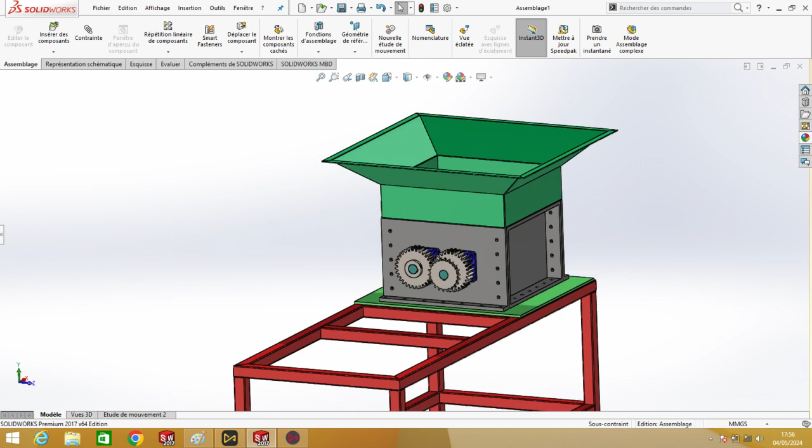In this video today we will make the hopper. This is from the top side of the box of the machine. This we can put our plastic for shredding, so we need a hopper here.

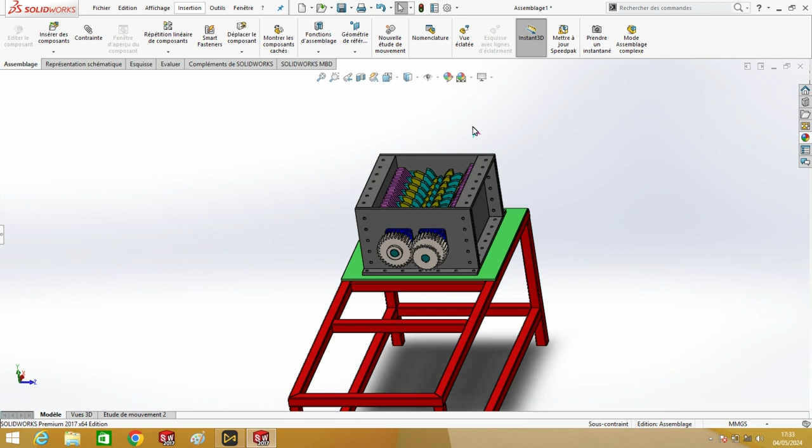So let's start to make this. We need to open a new part. We need also to open this parallel. Okay, like that. We need to know now this dimension, the inner dimension.

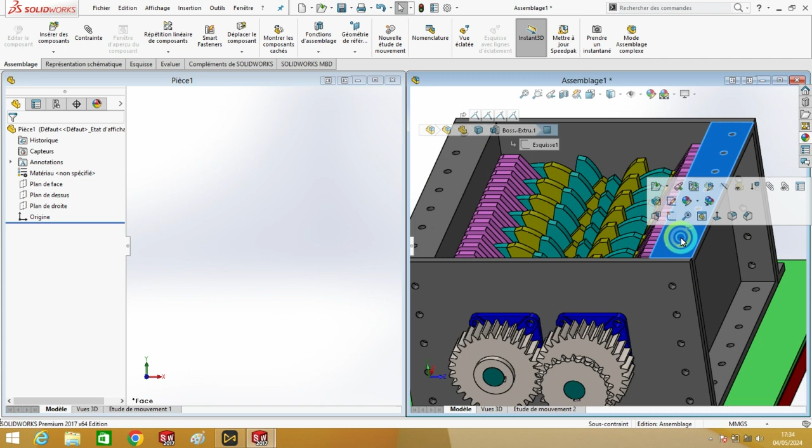Let's make it. Okay, we need to make it on this plan. Okay, so we need this measurement.

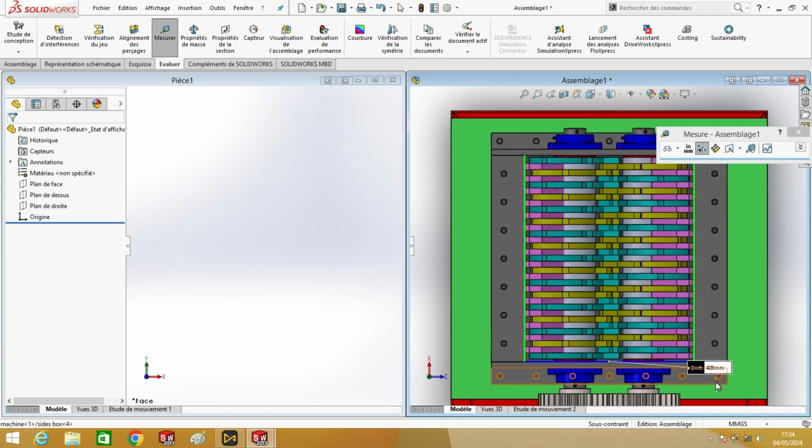First of all we have this, from here to here, it's 406. Okay, so let's make here a rectangle. First of all we'll choose this plan.

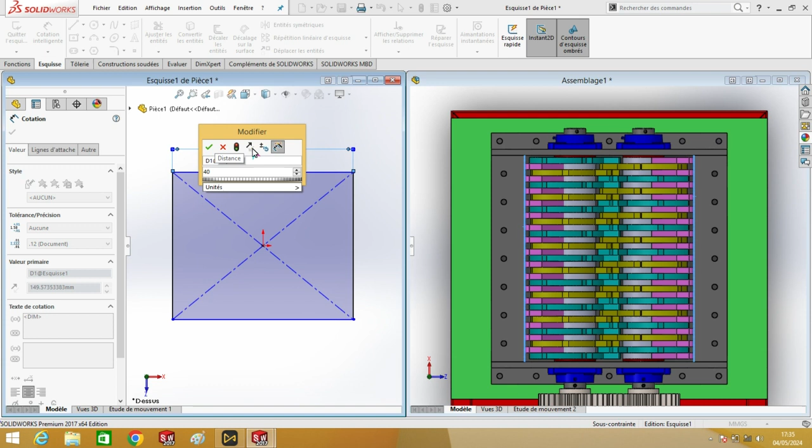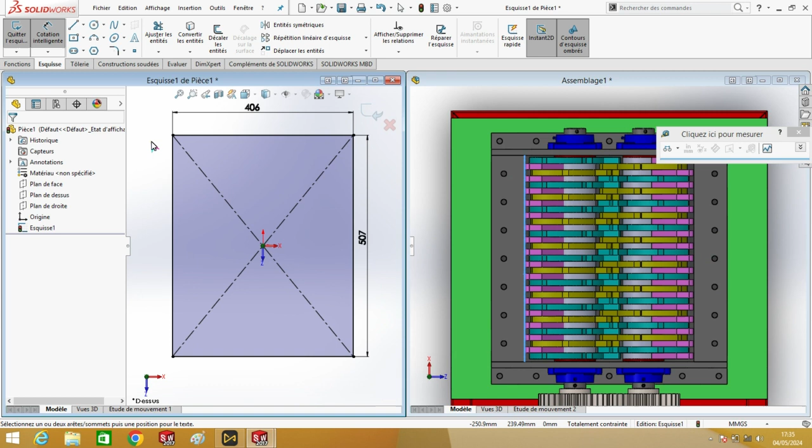This is 406. Sorry, 406. Okay, we come back again here, we check this one, it's 507. Okay, this is the inner. Okay, we have also outside rectangle.

Okay, so we need to know from here to here, 617. So here we have 617. No, sorry, this, not this one. It's from here to here, yes, 537.

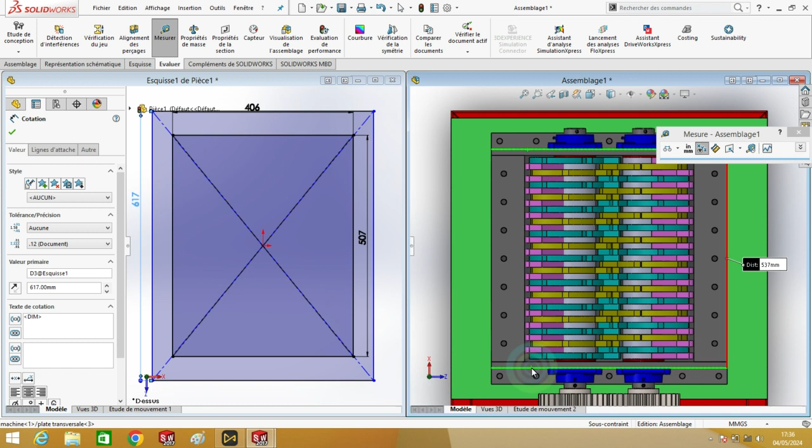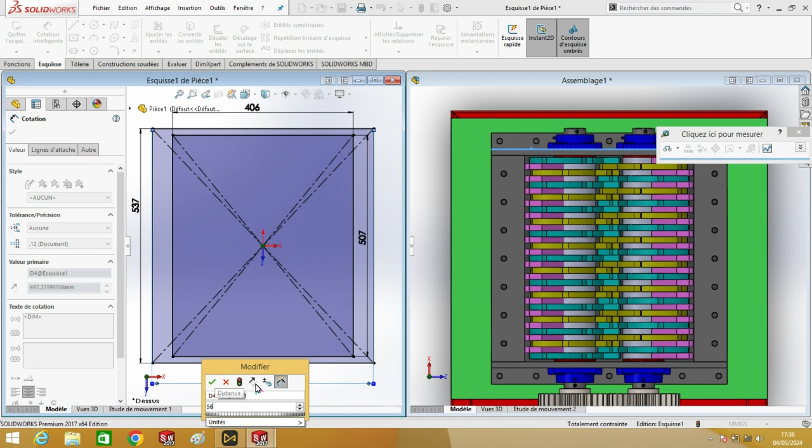This 537, yes. Okay, now here this 568. This 568, and that's it. We can reduce this. We close this.

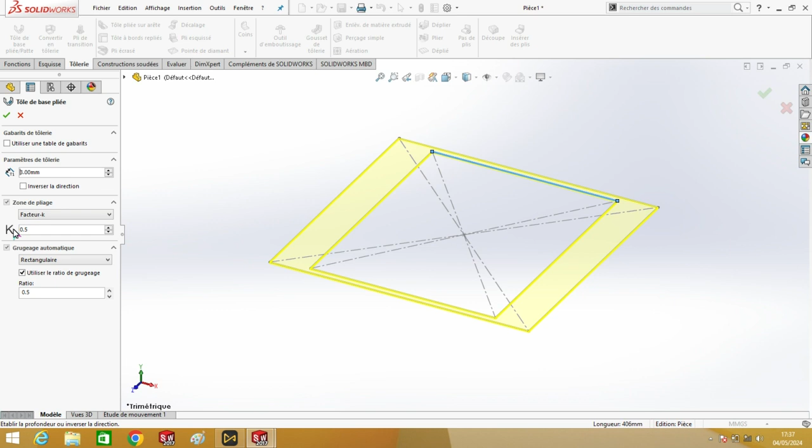Okay, now we go to sheet metal. We choose this sketch, and it's okay. Here we choose 3 mm as the thickness of the sheet. We keep this factor 0.5.

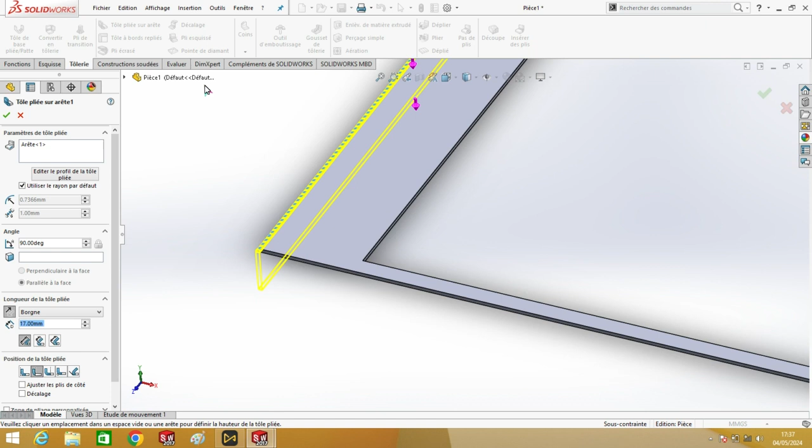Okay, now we need to add edges to make it as a box. So we go here, we choose. Okay, we check one, just one, and we edit first. For example, this needs 90 degrees. If we put it like that, see, if it makes an angle, no, we need it 90 degrees.

Here we need the distance, we make it 150 mm. Okay, here we need it outside. See, if we choose this, it will be inside. Okay, let's keep it inside, better.

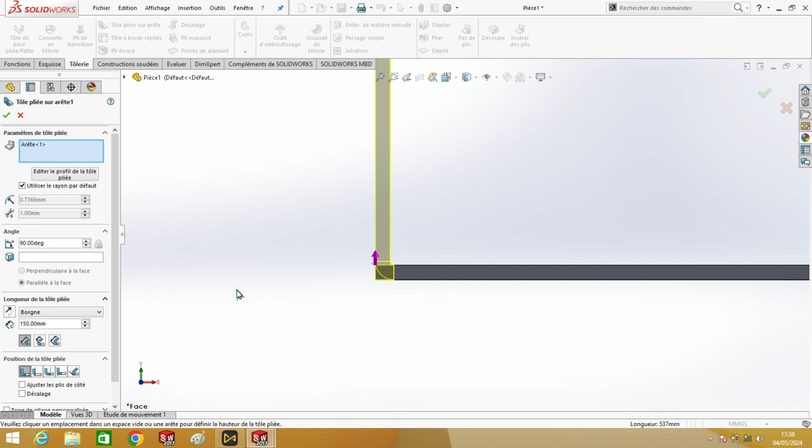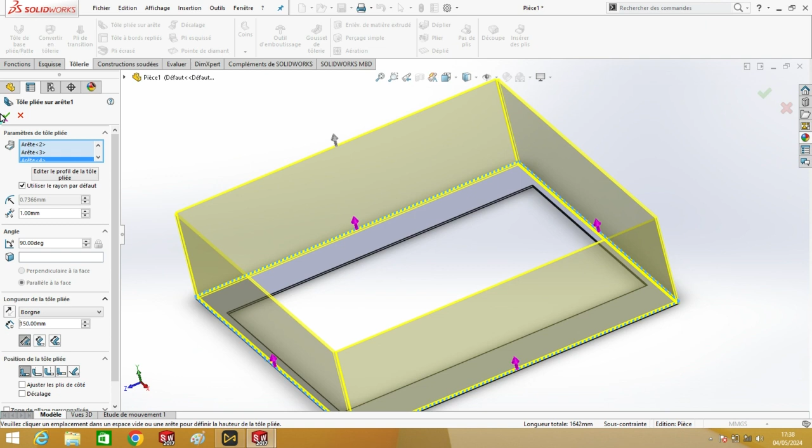Now we will choose the other line. We need to make another edge. SolidWorks automatically recognizes the edges, and it makes them all the same configuration, and we hit OK. Now it's OK.

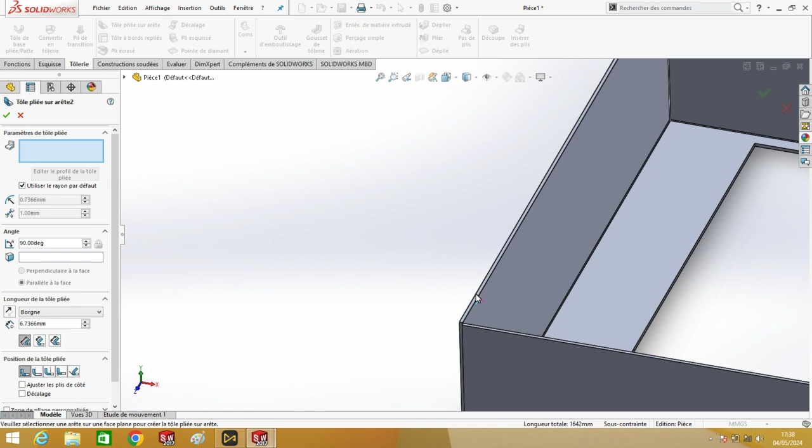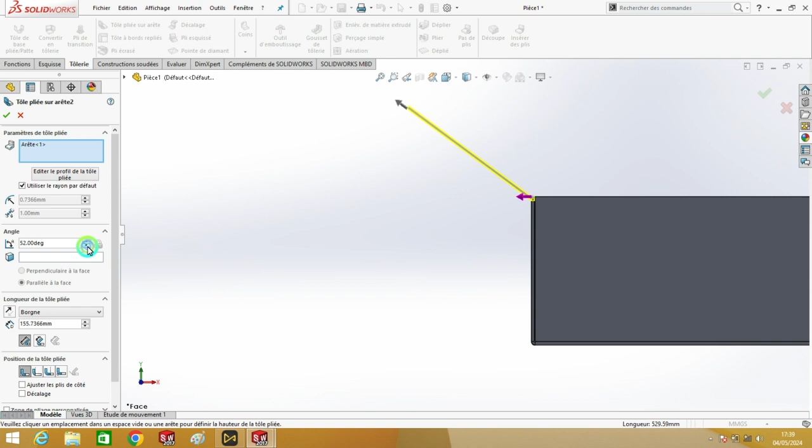Now we need some edges, but not perpendicular, we have a little angle. So as before, we go this, we check this one. Okay, we make it here, and we adjust for the first edges. We need angle, so we'll adjust this. We reduce it. Okay, I think 50 is enough. Let's make it 50. Okay, the length, let's make it 200, and it's okay.

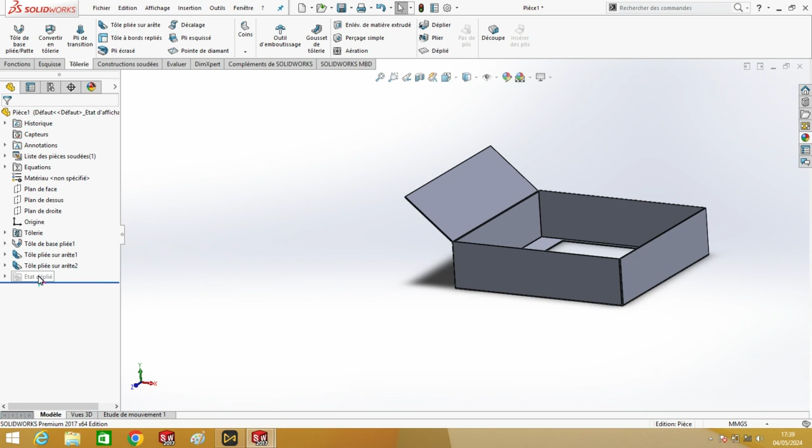Now we have to add the other edges. Okay, so we will choose this also, and this, and this line, and okay.

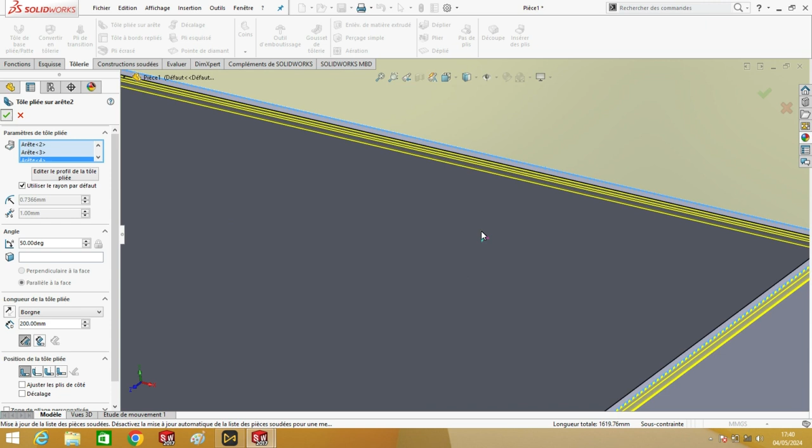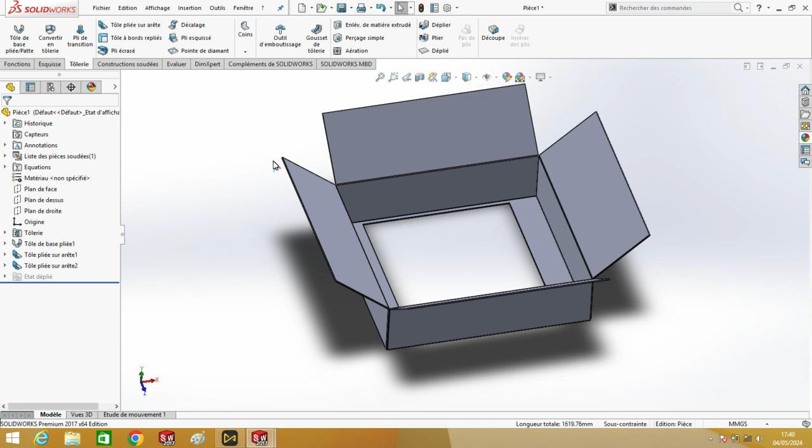See, now it's okay. Now we need to close this whole area. We need to clear it, so it will be like a closed box, closed hopper. But first we need to add here a little edges also. So same as before, we need to make here.

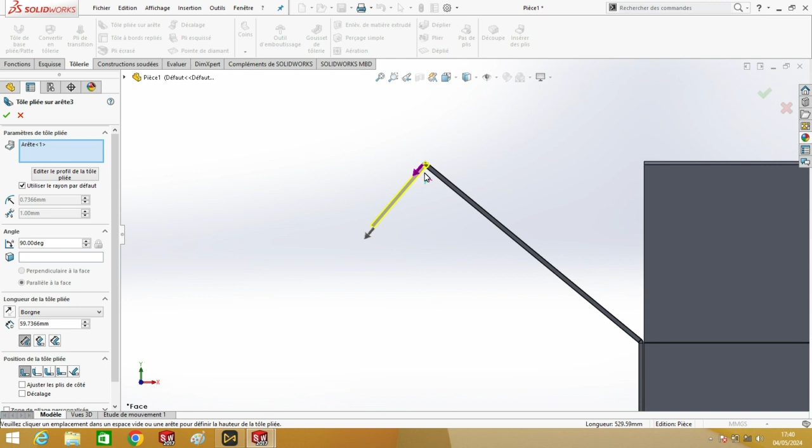Okay, but here we will see something. See, SolidWorks as default makes the edges perpendicular at the concerned one. So we need here, no, we need not perpendicular to this, but parallel to the horizontal plane. So we check this face, we choose this face, and it will automatically be parallel. As you can see, parallel in this face.

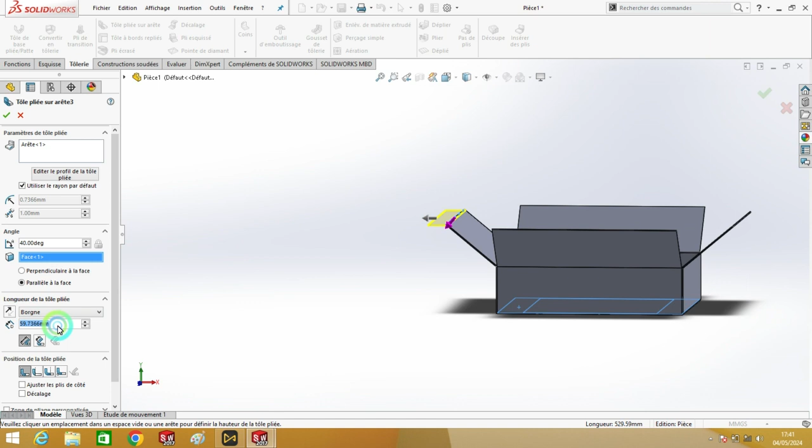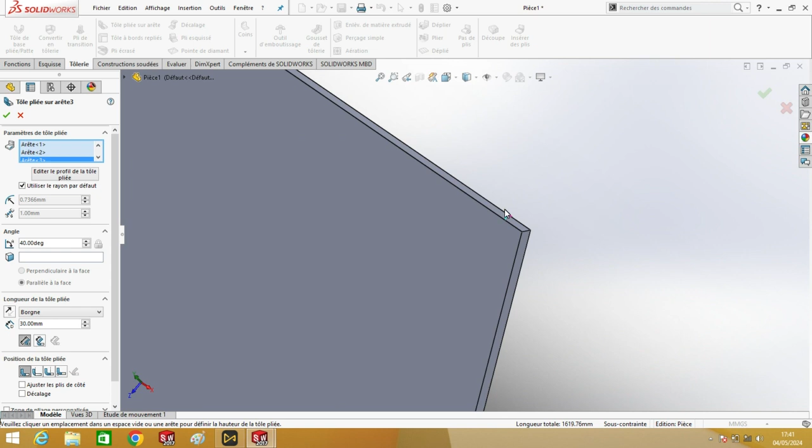The length, we make it 30, it's enough. Same with the other edges. And okay.

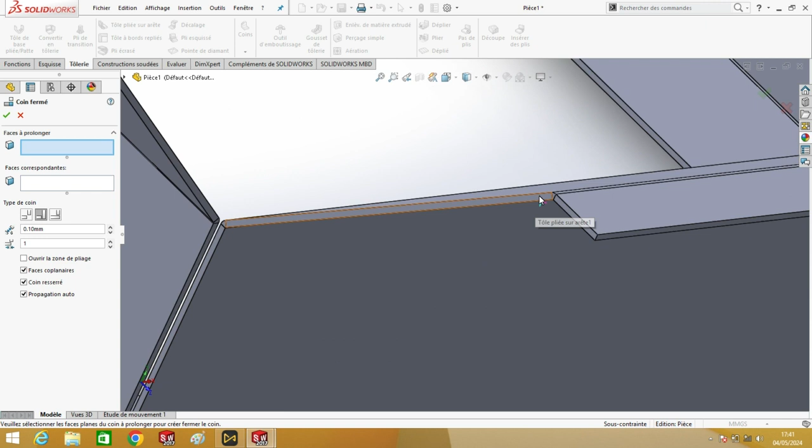Now time to close all this. So which is this closed corner. We choose this, and it automatically recognizes all the faces. We do the same with the other corner.

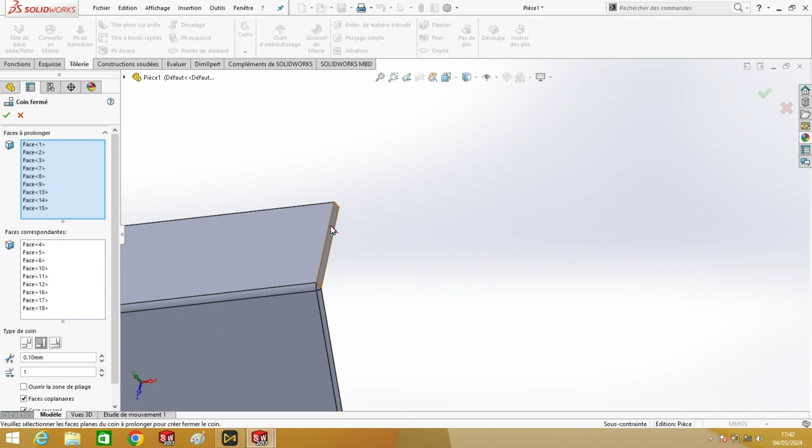We remark here, we need this, this way, and here we need a gap between two faces. So it must be 0.1 mm. It's enough. We hit OK.

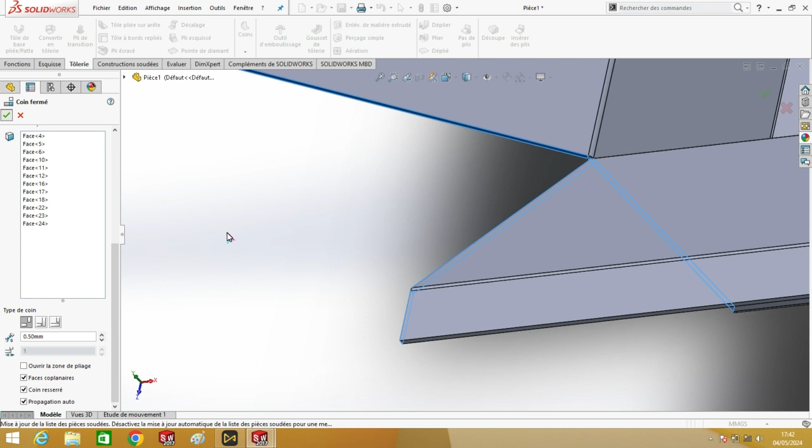As you can see, it's closed. See, this is the 0.5 mm. This is for welding.

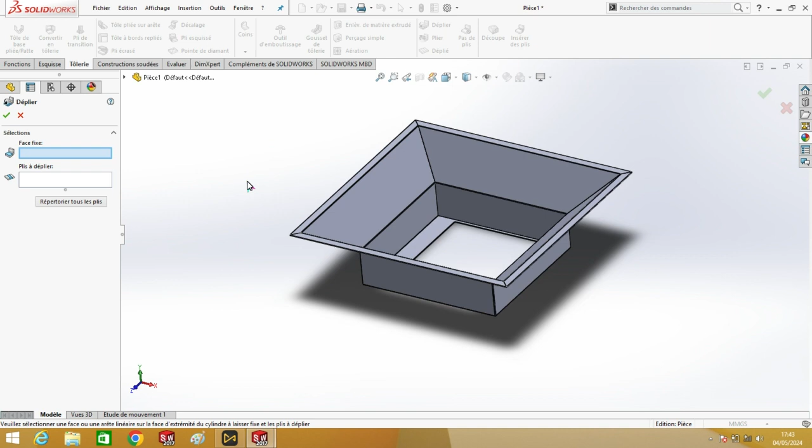See, this is the final parts. We can check the sheet metal, how it is. Here we can see the sheet metal before bending, how it looks. Okay, wait, okay.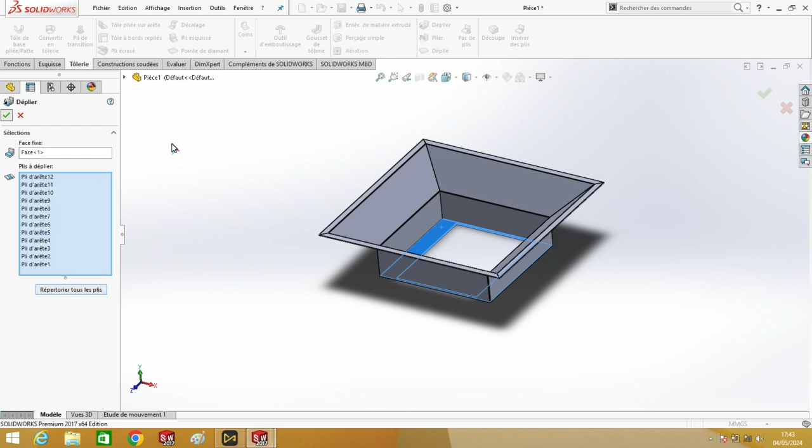See, this is the sheet. All this line is the line for bend. Okay. This one for return it. Okay.

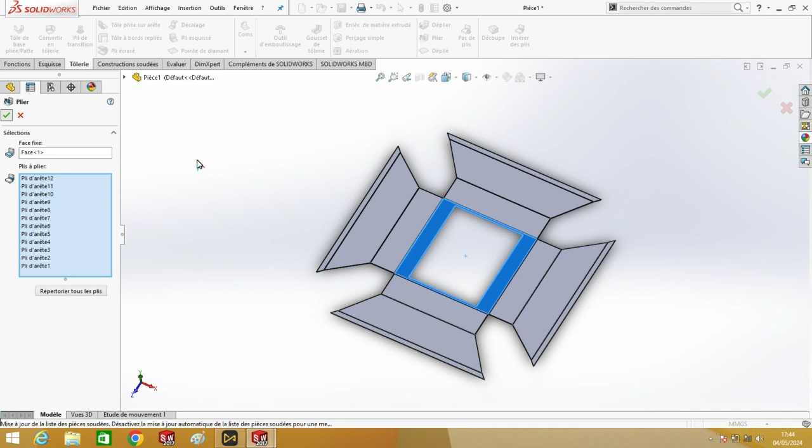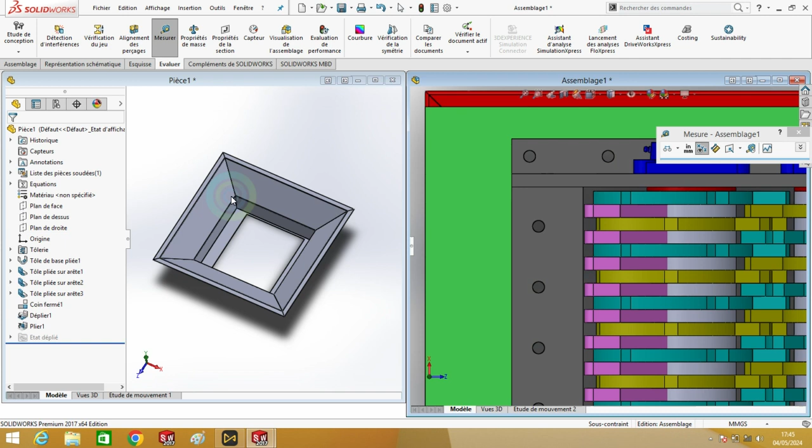Okay, we can now also make the holes, because here we have holes, so we make it here. We have a hole here, so we have between this, okay, between this, between this face and this face, 60 mm, and from here to here it's 50 mm. The hole is 12.5.

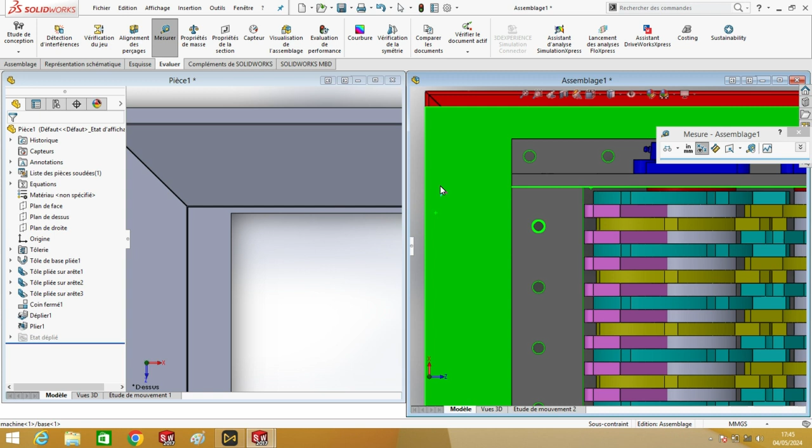So now better we will check from here to here. It's 45. And this face, it's 12.5. Okay.

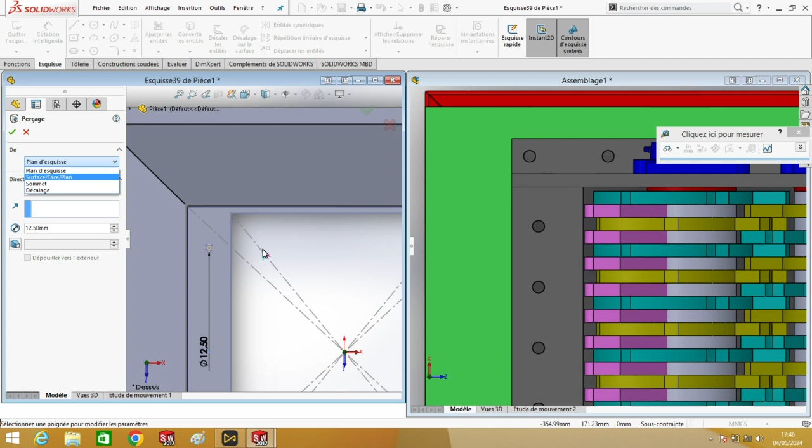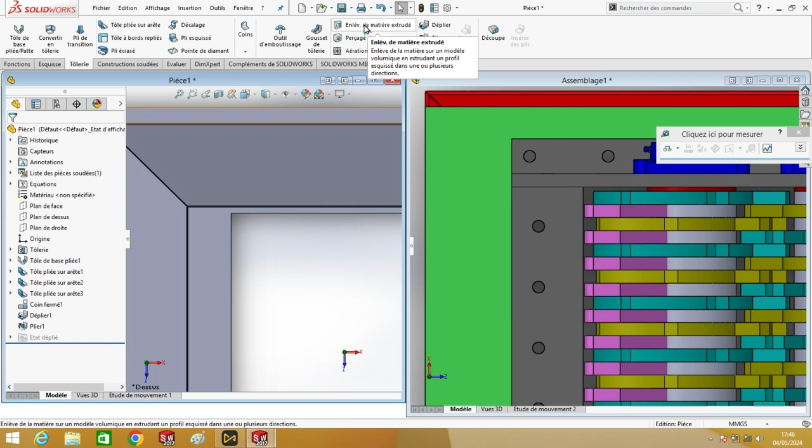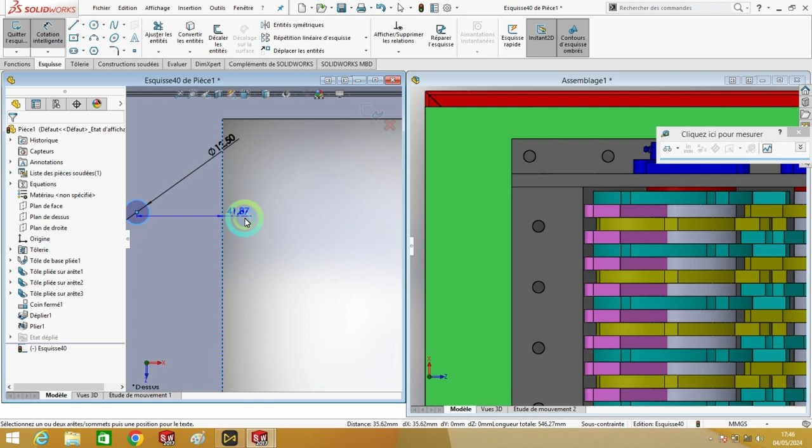Now we choose other, better. So we make, or we make it like that. We need here, okay, so we make this circle, is 12.5. So it's from here to here it's 50, and from here to here it's 45. Okay.

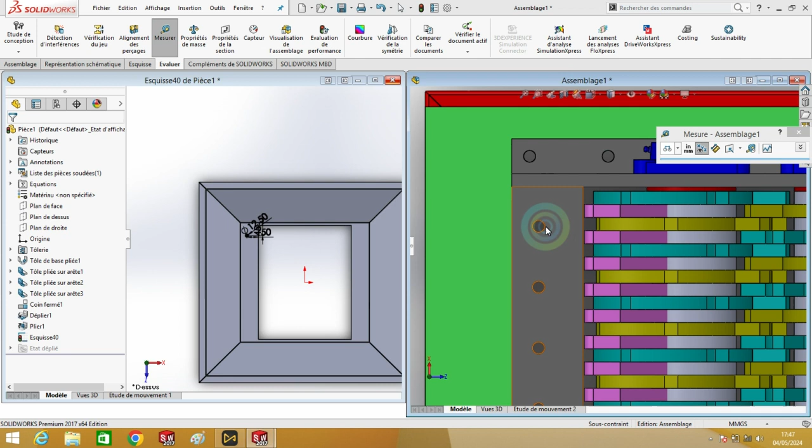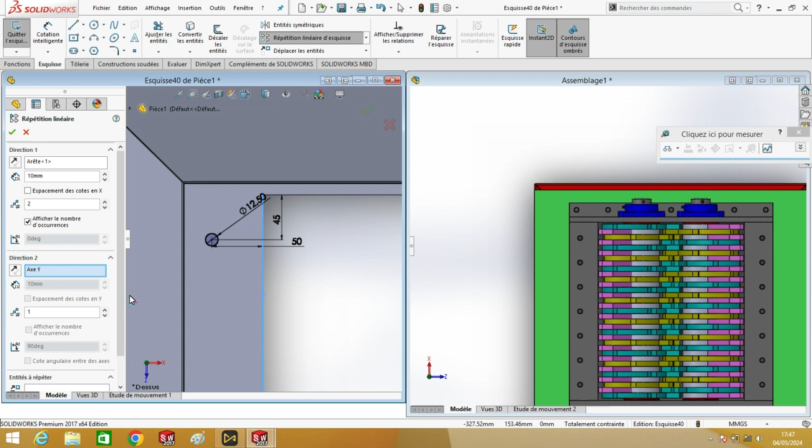We can also check here between the holes how much we have. It's 69.5. How many pieces? 1 2 3 4 5 6 7, 7 total. Okay, we will repeat this. Okay, distance is 69.5. 7 pieces. Okay.

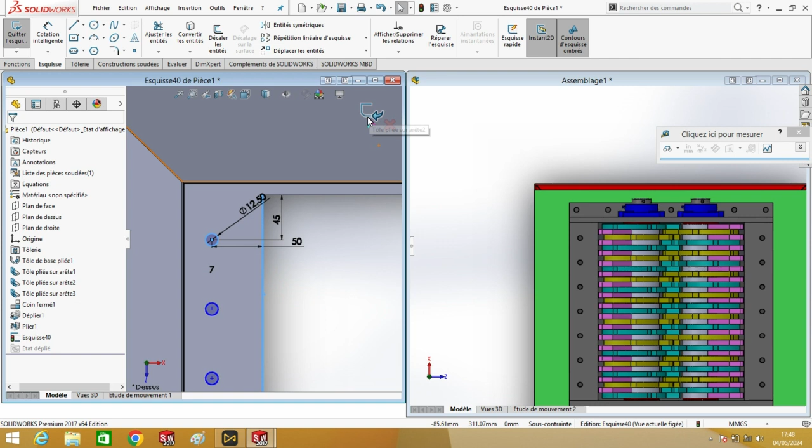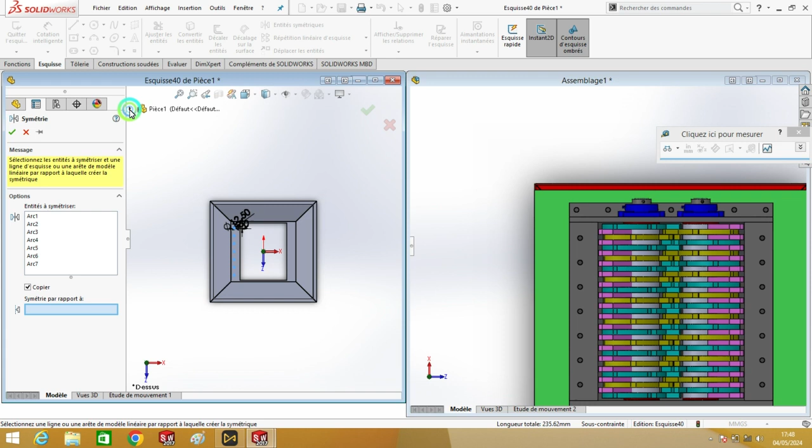Okay, now we also need to mirror this here, so we select all this and we select this plan. Okay, we cannot select this plan, so let's make it first. Okay.

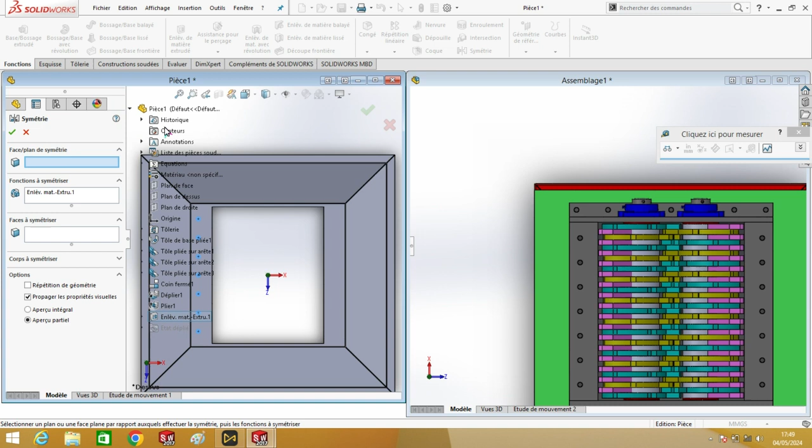These are all done. We try now to mirror this. It's here. We have function, we choose this and we choose this plan and it's okay.

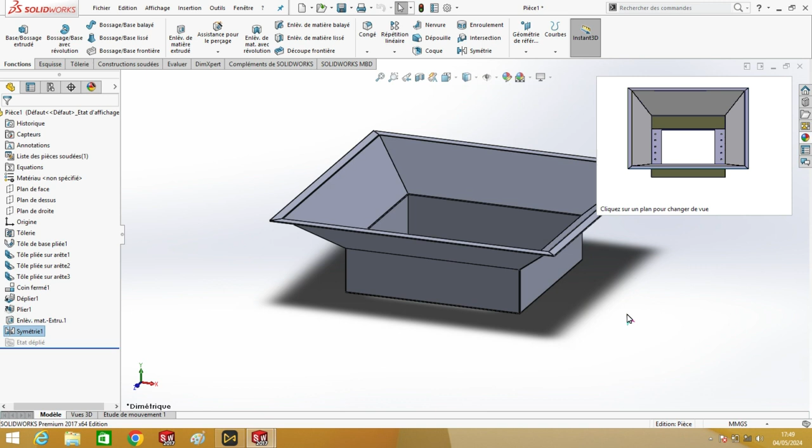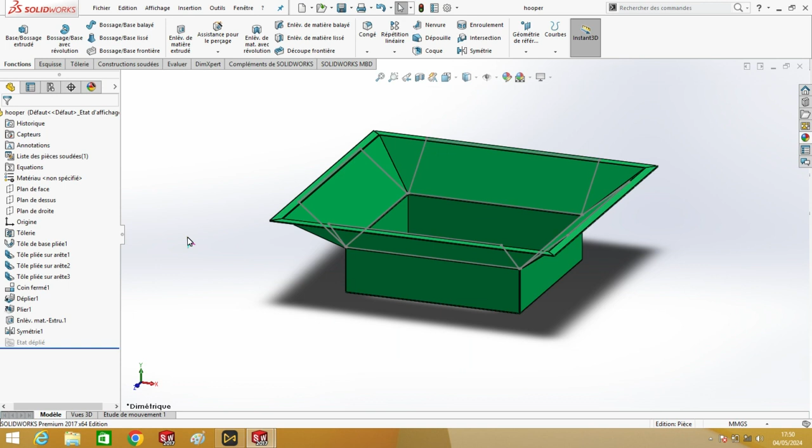Okay, now we reduce this. Okay, we'll add some appearance that shows this one, this color. We'll save this as a hopper name. And that's it. We'll add this in the assembly.

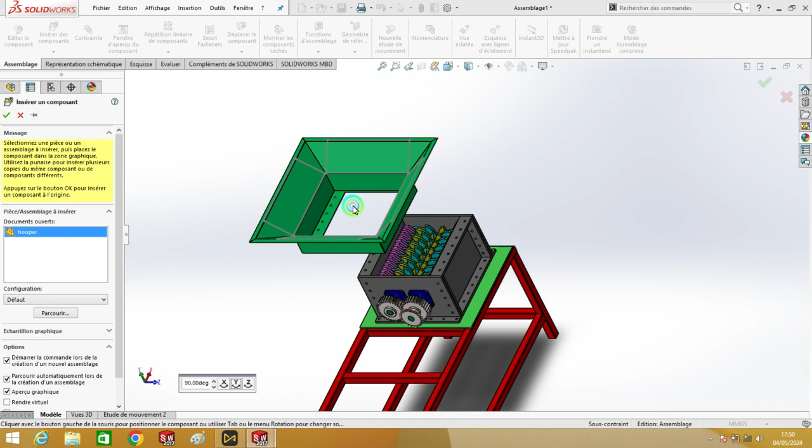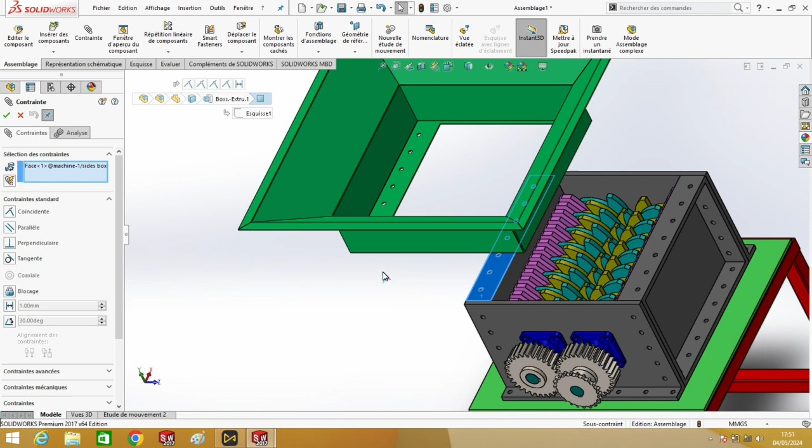Okay, we'll rotate, so it's okay. We'll add this line. Okay, we need this face. It's coincident with this face. Okay.

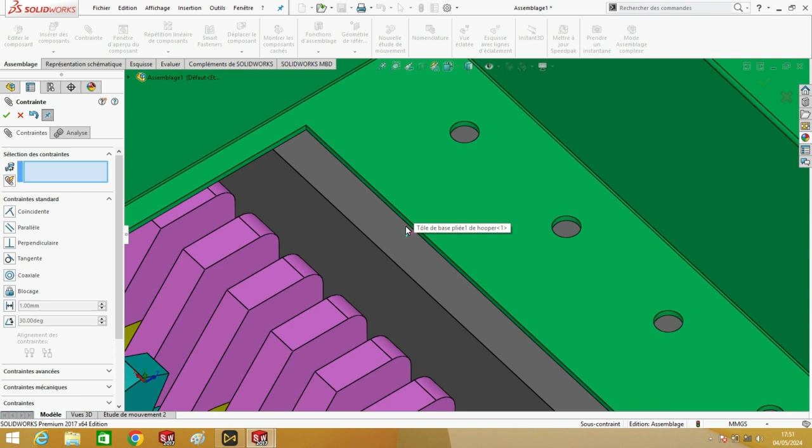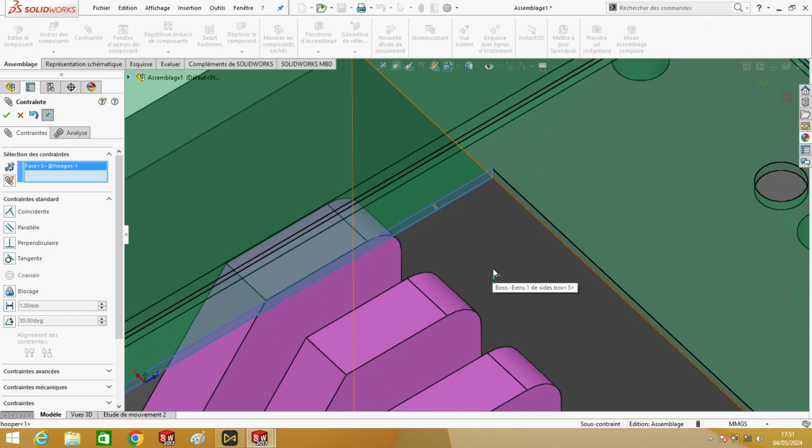This is also coincident here, and this here. You can see now it's okay. Also we check the holes, all holes matching. Now we need some adjust. We have this holes, okay, all holes are matching.